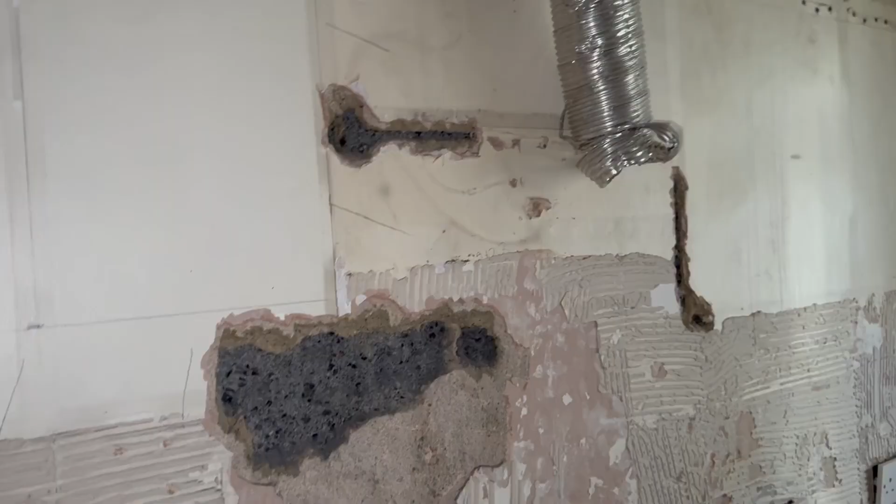First up, I'm seeing that the kitchen extractor fan appears to go out, but I'll just check it. That's often an issue. I'm seeing some localized rot here. That's probably where a sink was originally. Yeah, so you get some there.

So obviously all the plaster's been chipped off the base of the wall, which suggests to me that a damp proofer has recommended that, because it's only gone up to that height. But I wouldn't put in damp proof as an impermeable slurry.

I would put in either dry lining, which is just plasterboard, or I'll show you an example. I would use a thin insulation that is relatively expensive. It's called thermal space therm, and it has benefits.

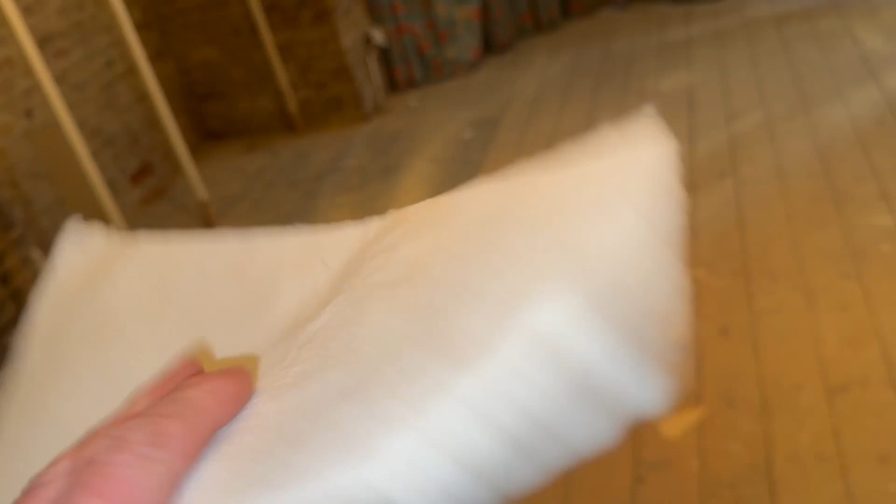So you want to have something that's breathable, so it allows vapour in and out. This one is a simple lining paper, but there wouldn't be much point having that on top of new plasterboard. But what you might think of is this.

It's called space therm. I've got the product name here. I've used it in a property recently myself. It's very thin, it just gives you a bit of insulation. It's breathable. And that's instead of plasterboard, or? It can be instead of plasterboard.

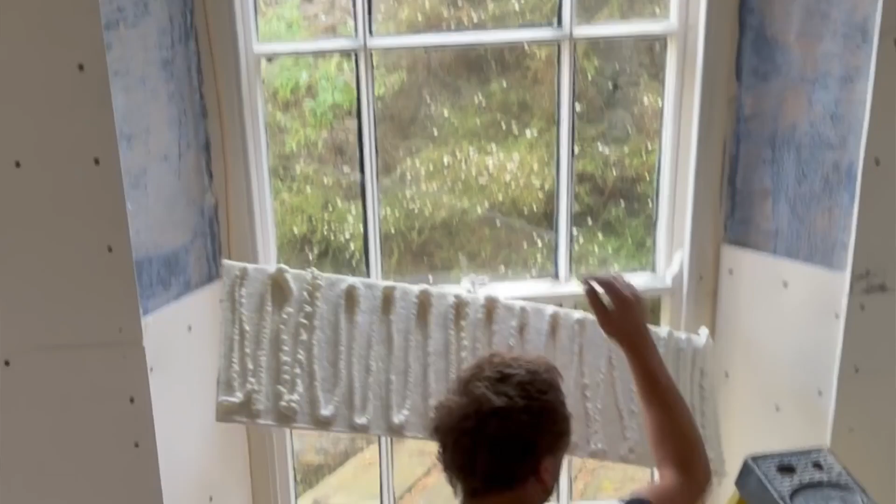I'll give you some more information on plastering it, because it's not easy to plaster. You have to use what's called blue grit on top of the space therm to get the adhesion, and then you have a final skim coat of plaster on top of that. But that's probably how I would go.

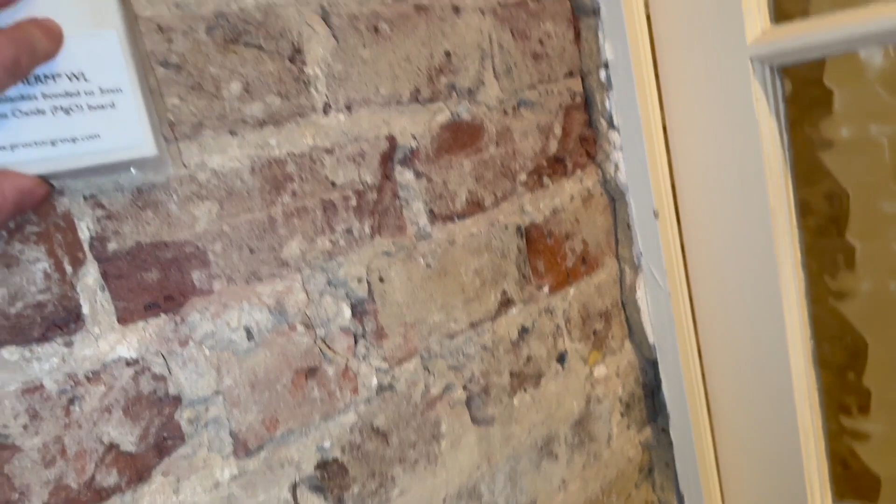You have blue grit on this, to give you adhesion. Then you'd actually use screws into the wall initially to get the bonding and adhesive, and then blue grit on top, and then it can be skimmed. You'll see it's not going to be very proud of the existing wall, so you're not going to lose space.

The three benefits of this are: you're going to get heat insulation, you're going to get some sound insulation so you're not going to hear your neighbours as clearly on the sides, and it's vapour permeable, so you don't have the issue that you get with slurry.

So I see the plaster's been removed from here. Yeah, there's a vent. If you feel inside the old fireplace, you can feel a draft. I don't know to what extent the chimney is open, but you can feel it. I'll discuss that in a sec.

But do you see how you've got this area here? Now I wonder whether you've got some hygroscopic salts here, and the risk is if you put anything aqueous onto this wall, the hygroscopic salts will come through.

But with this, because it's essentially like a fleece, a material, the water isn't going to go through that, so you shouldn't get hygroscopic salts unless you get extreme cases like a leak or that sort of thing. And anyway, when you do get hygroscopic salts, it's a very simple way of solving it.

But I'm looking at the way everything is. I'm guessing you had a case of hygroscopic salts here, which often people call rising damp, but it's nothing to do with rising damp. Yeah, it comes from chimneys.

But you can get those same salts from rising damp, but in this case I don't think it is. You're in London, you don't get rising damp in London because the groundwater is pumped out.

But could I, in theory, just—because my lease extension is going to be like a fucking fortune, I need to try to save money on the renovation.

You could dry line it, like just with plasterboard, and that will basically be fine. Originally I was going to get a guy, I thought, let's do the old-fashioned way, not like slurry, but the old-fashioned wet plastering.

I would just dry plasterboard. What you want—big tip—you need to use a non-aqueous, like a plastic type adhesive. If you use an aqueous adhesive, the hygroscopic salts will just go through the aqueous adhesive.

I'll find like an epoxy resin or an expandable foam type adhesive. That'll work because that's essentially plastic, it's non-aqueous. Let me just check on this, I'll push it down so I don't get worried about it.

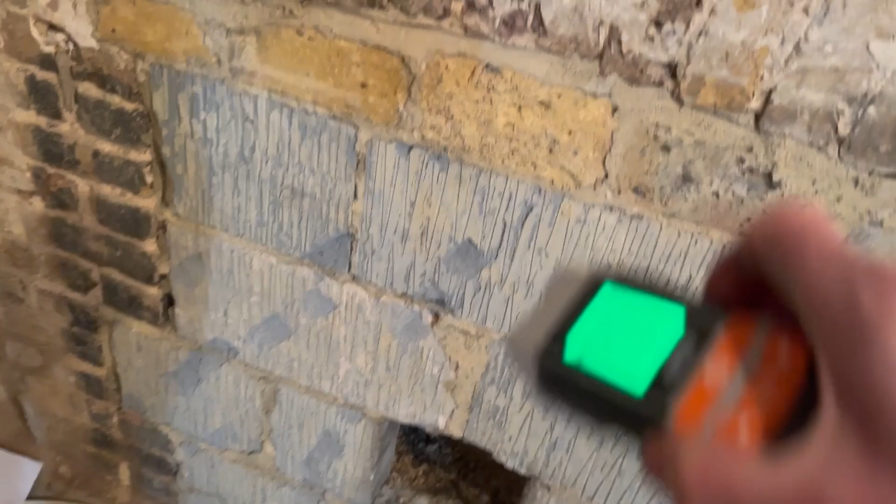It's useful to have a damp meter to tell how dry a wall is, whether it's drying out. On a flat masonry wall like this, that's telling me it's dry. You'll see it seems damper there than there, but that's because this uses radio waves, and it will naturally bounce back from a smooth surface more than a rough surface. So don't worry too much about the absolute number - it's a relative thing and depends on the material.

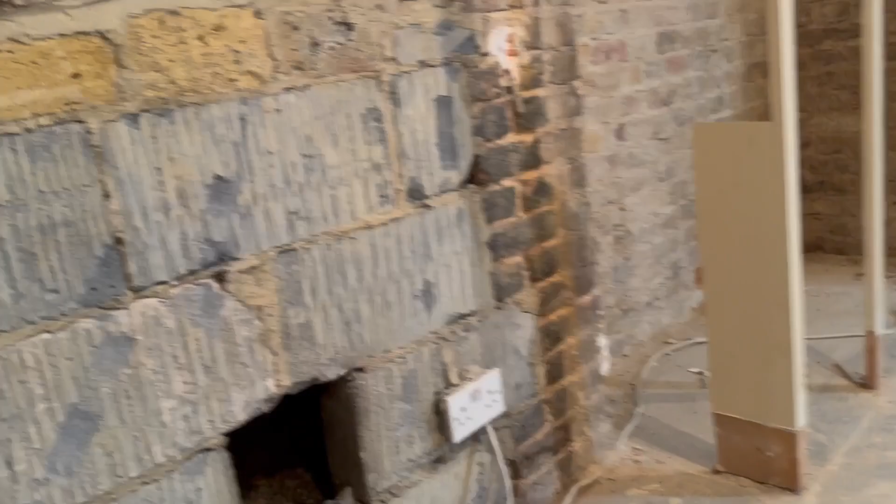So it's getting down towards the base of the wall. That sound of dampness, or the sound of the damp meter, is a useful indicator. But there's also a surface one, and maybe that can be more useful in this environment. I'm going to take part of it off - these are doing salts, and 20 or even below 30 is really what you're looking for. That's pretty dry, so no.

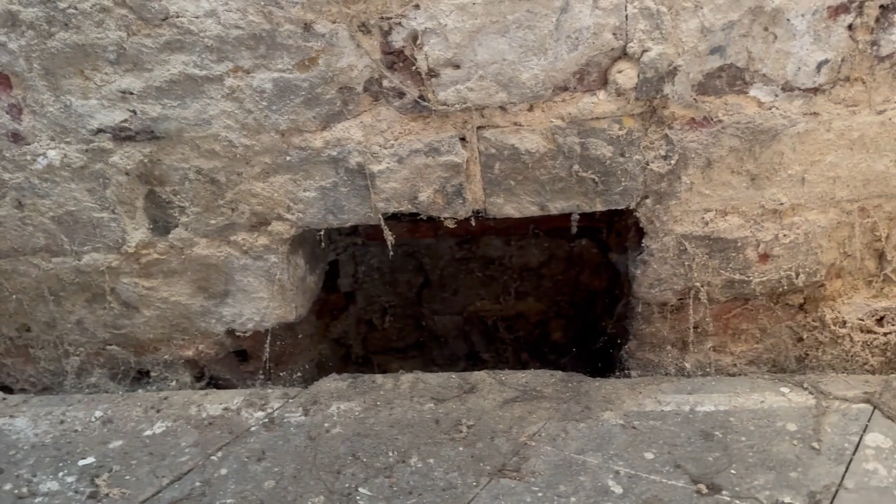These bays, you've got a risk of dampness from the outside. I think that's why the air brick was there - what it does is cool down this area. You see, it's damper here, and the reason why is, I assume you haven't had heating for a while anyway, but it's pretty warm without any heating, as you can kind of tell.

Normally the heating would have been at the other end of the wall, but I wanted to think about installing some plumbing to get a radiator here, sort of heat up this bay area a bit. Put insulation behind the radiator. Good tip - because the biggest heat loss is where you're putting the most heat next to it. Anywhere you want to insulate is where you've got the cold, so bays will tend to be cold, and I'd put insulation around bays.

Would you strip everything here and just redo everything, and use plasterboard? Yeah, you pretty much might as well, I would use... So I actually just renovated a property using this Spacetherm for the lower section of wall, and then the higher section of the wall I've used the cheaper Celotex.

Celotex is this type of material here - a sort of plasticky material. You don't want it for the lower sections of the wall because it sweats and will cause the wall to become damp and you'll lose energy. So what you gain, you end up losing, and you can also get rot in the subfloor void. But if you use Spacetherm below, you've got the vapour coming out here, and a cheaper insulation for the majority of this.

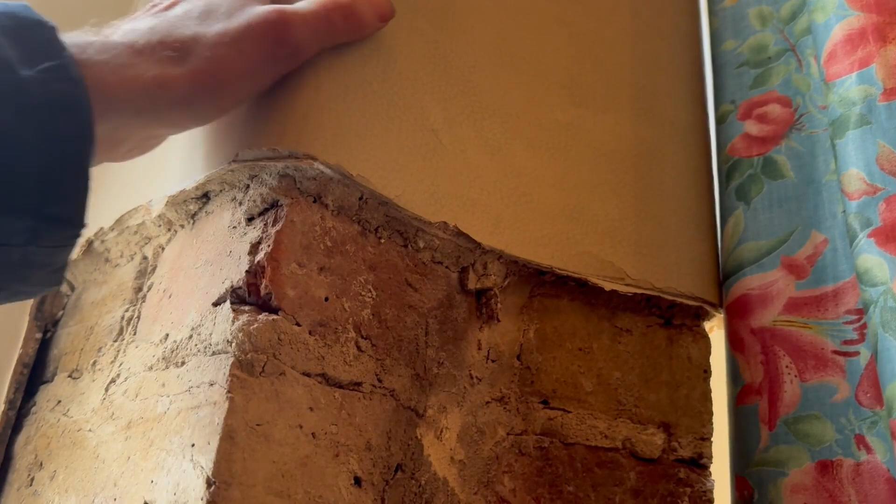Interestingly enough, you've got nice curved edges here. You can find it really difficult to get plasterers to put the curve in - they always want to use metal beading. I managed to persuade plasterers to do it, so if you find a plasterer just say you want that replicated, then you might get successful.

You've had a bit of a leak here as well. Oh no, maybe not. No - yes, there was something, and that was in the damp report that I sent you. They mentioned there was a leak behind the bathroom, the ceiling where the bath was. Yeah, it was a bit of damp, a gap - yeah, you can see. This goes into the kitchen there.

I don't know what you thought of the flooring. I was sort of eager to see. Well, I'll have a look underneath - it's what's called a suspended timber floor. I was going to, assuming everything is okay, instead of putting stuff over it, just sand it, stain it, and varnish it. I think that's a great idea, but what I'm going to recommend is having access to the subfloor void.

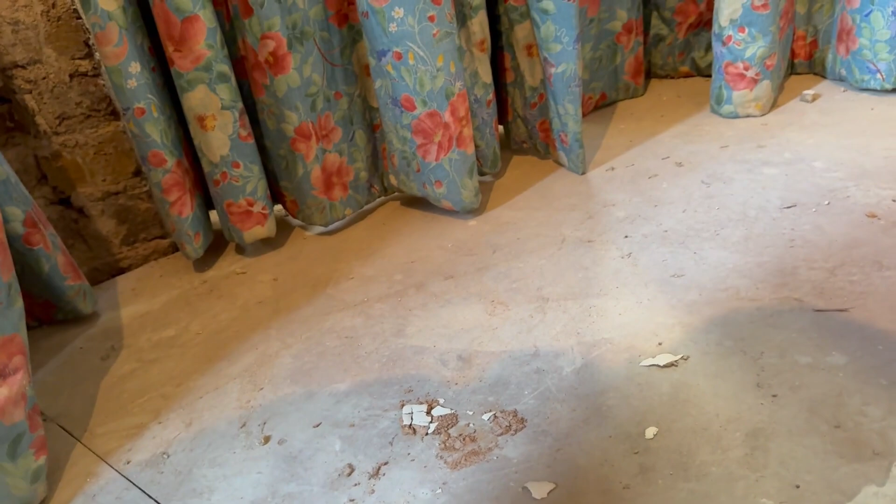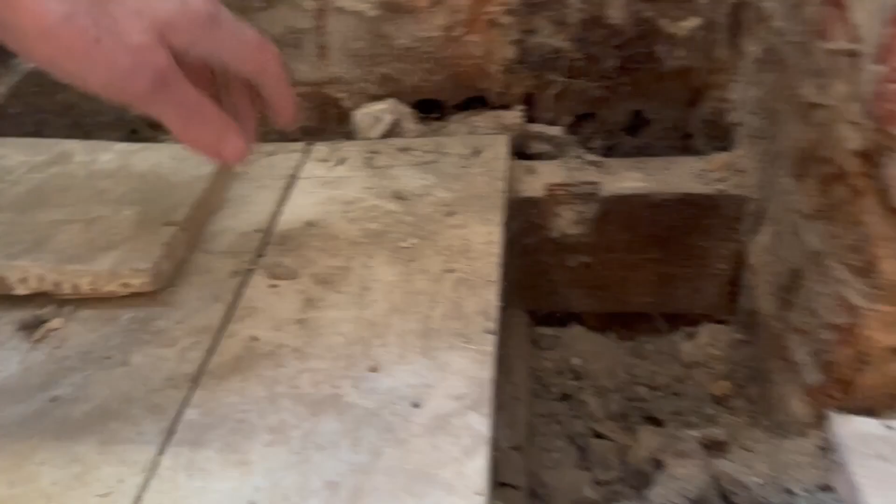And just keep a monitor, like a data logger, in there. You see how this piece of timber is broken - you can lift it up. Maybe this one lifts up too. It'll take a bit more persuasion, but I should be able to lift it up. Oh, there we go - and just have a monitor underneath there, so you can make sure there's no leak in the subfloor. Otherwise you have a risk of condensation forming above the damp-proof course and causing rising-damp-like symptoms.

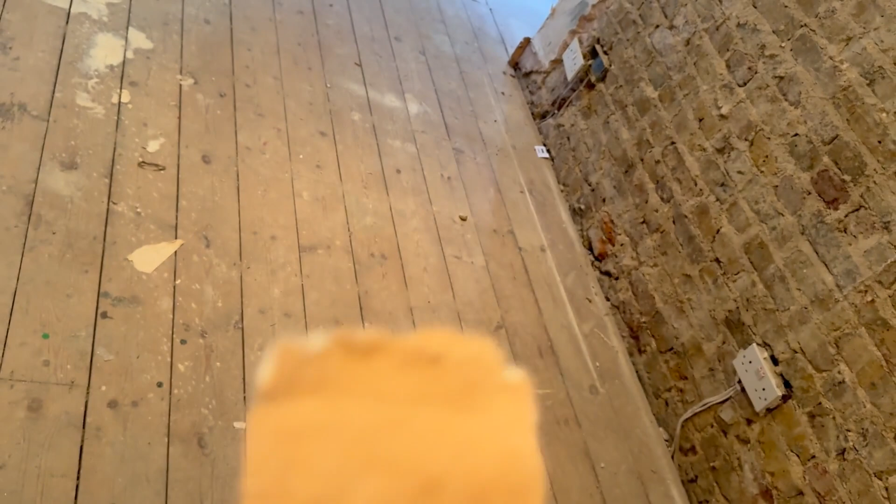This piece of paper is damp to the touch in humid conditions, and that's because it's got hygroscopic salts, calcium nitrate. A piece of paper like that would normally dry up, but because it's got these salts, and calcium nitrate has a specific relative humidity of 50% at normal temperature.

Just like, so I put these data loggers in this. These have got salt, normal table salt, and water. Table salt has a specific relative humidity of 75%, which is what I use to calibrate. So it's the same concept, and I think that's what you had there, and I think that's why your mother was led to believe she had rising damp, but it's not.

It's caused by the salts that come from the chimney breast. All you need to do is stop them moving onto the new surface. They're not a source of water. They're in dynamic equilibrium, meaning they're constantly evaporating and condensing in a cycle.

Got it, so it's nothing to be worried about. And if they ever did come through, for whatever reason, all you need to do is use an oil-based primer, like cover stain, like Zinsser cover stain.

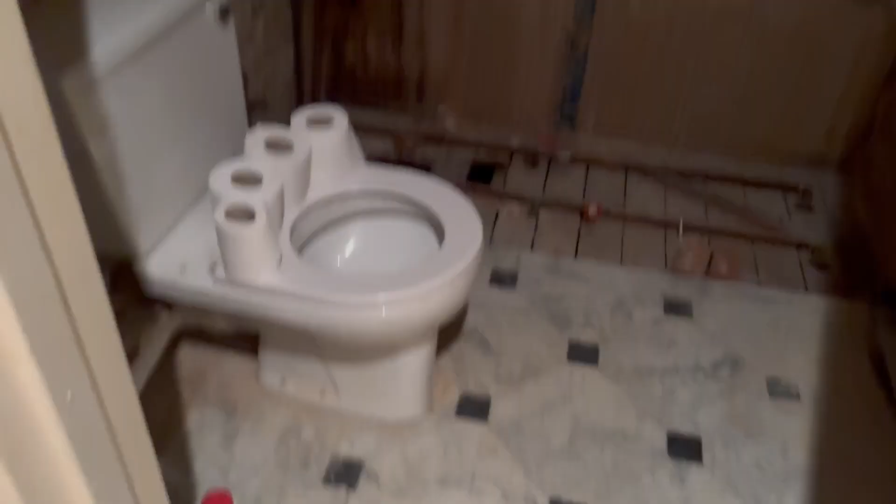Very simple. So we're talking about aqua panel, which is a good idea for the bathroom.

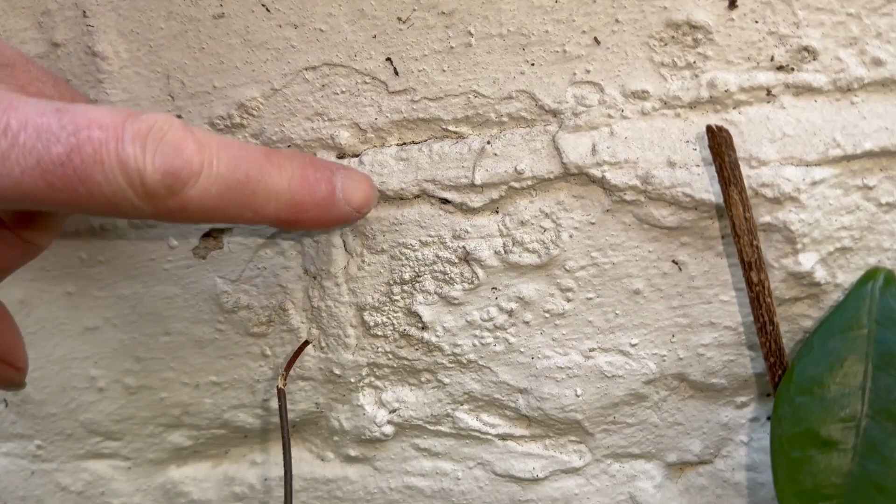This is painted, which is not brilliant, and it's just looking a bit rough there. But there's a bit of water that has got in here through the top, and is causing calcium sulfate salts from the mortar to crystallise under the paint, and this causes micro cracking, increasing the speed of dampness.

So what happens is you get a damp external brick that causes heat loss, but I don't see it penetrating all the way through. You just need to have it painted regularly. Do you see all of these little micro cracks? Lots of micro cracks equals quite a lot of water being absorbed.

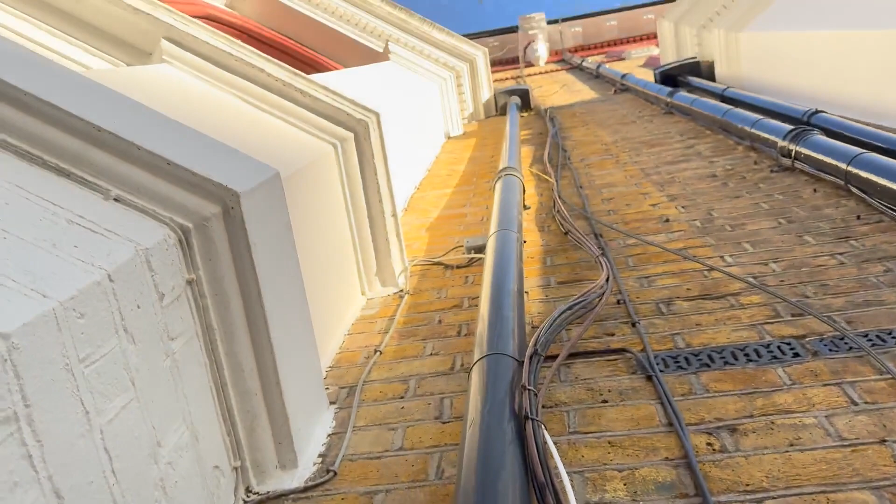You've got timber here, it needs to be painted. It doesn't feel like you've got rot yet, but I think you'll get timber rot fairly soon if you're not careful. So you see that green, that's an indication that water is overflowing, probably from the hopper there, but possibly even from the gutter all the way up at the top.

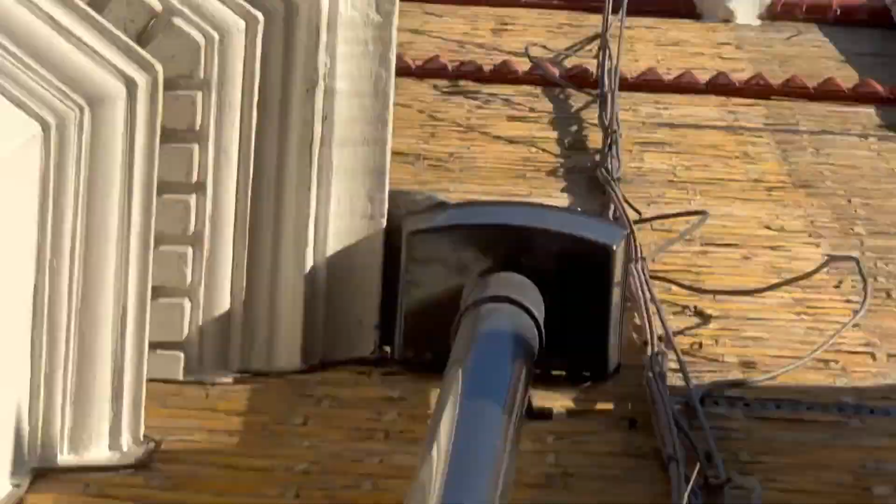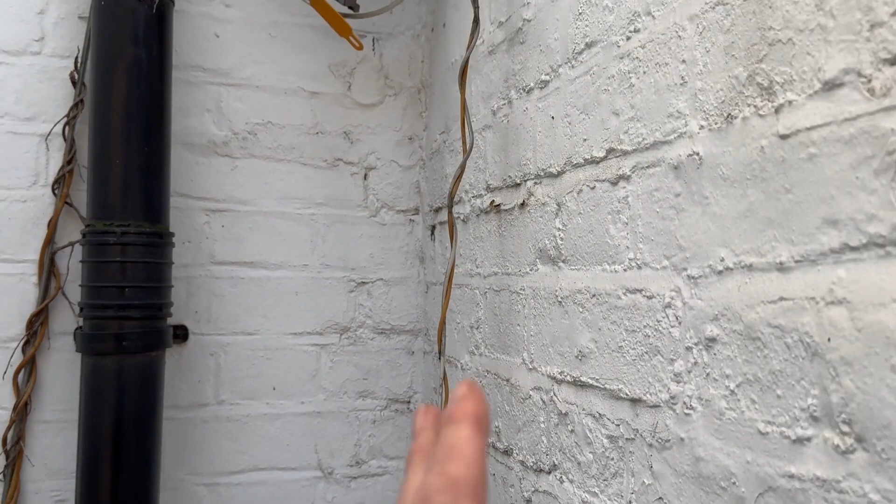You'll have to have a look during a rainstorm. I don't think it's particularly going to affect you. It's got lead flashing, I'll have a look on top of that as well. Yeah, this is going to cause heat loss. This wall here is a thermal fin.

Now your neighbours had damp proofing treatment, and I'm just going to talk it through. And what I recommend you don't do is what your neighbours have done. Let's have a look through here. It's difficult to see, I was just talking to the camera.

Another survey that I've done shows that if you have too high a fan speed, it's noisy, and people don't like it, so they turn it off, and it becomes counterproductive. I think that's fast enough, and also this light turns it off immediately. I wanted to get a humidistat - I would get a continuous flow bathroom extractor fan. They normally have humidistats as well.

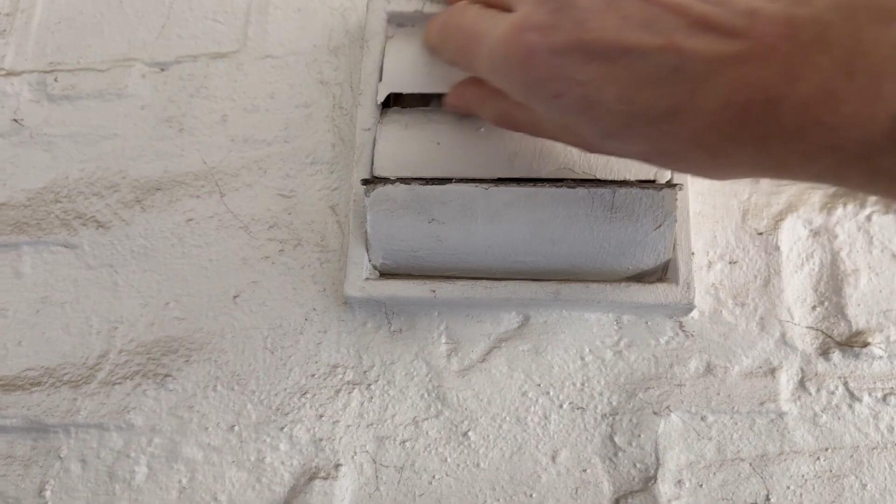The interesting thing with this is it's raised up. I had that at another property today, two in a row. Yeah, well, I had the electrician come on. He actually figured it out that it was going through there, and I was like, 'This is very good.' Anyway, I've needed a bit.

Or you're getting - I mean, it's a kitchen fan speed. You're getting 40, it's a howling gale.

When it comes to walls, you want to, as far as possible, be homogeneous. Obviously I've talked about something that isn't homogeneous, but that's for practical reasons. But you don't want to change the material too much between walls. And I think that if you had a separate plasterboard going on to plaster and then the whole thing replastered, I think you'll get a crack appearing where the old plaster is left.

Fine, okay. So anyway, in terms of the things that need to be done here, that's so I can tell the freeholder - whether they'll get on with it is another matter. But do you see all these cracks?

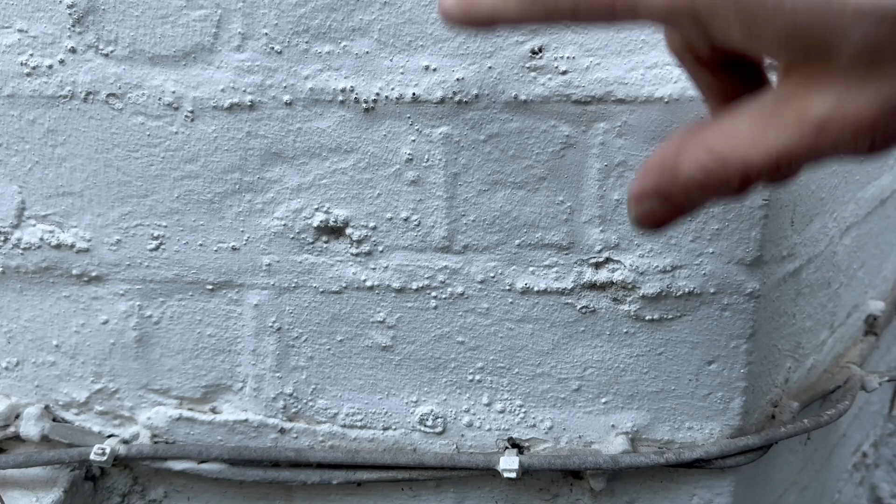These micro cracks will let water in. So wire brush down as far as possible, and then repaint it with the same paint as you have here. It's not a big deal in this case, but over time it will eventually become a big deal.

This isn't affecting you directly, but this is just an example of how you get calcium sulfate salts blistering. So they need to strip all this out and redo it.

And that's the same reason why you have this rust on, the fact that it hasn't been painted for a while. That's basically it. It needs to be done every so often. Most contracts will say every 7 years, something like that. I don't know what yours does.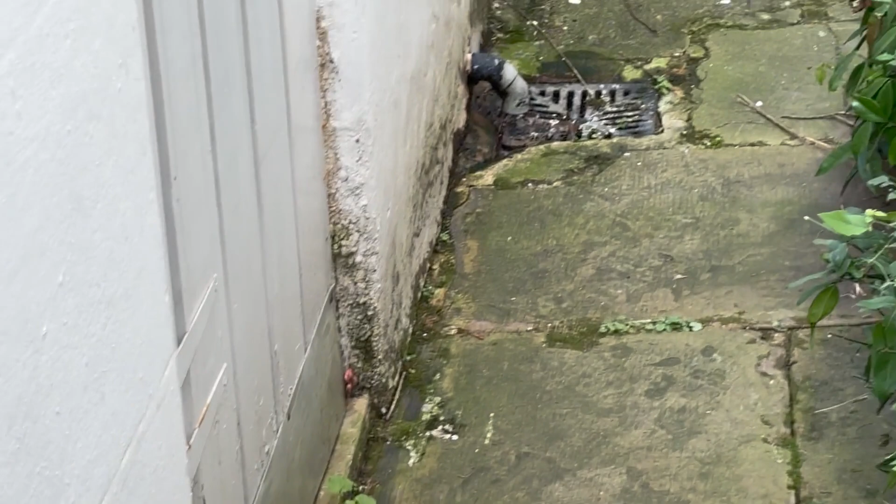Ideally that is drained away to over there. How you would do that here, I don't know, whether you use some sort of guttering system. It's probably fine as it is, but be aware that water coming down here is liable to be absorbed into here rather than go to the drain. It could pond. The drain looks okay, but again, have a look during a rainstorm and see what's happening.

I don't think it's ongoing, but you've got signs of woodworm here, just looks really old. You can spray it with permethrin, I'll give you links to doing that, but I'm just highlighting it as a potential risk. The thing here, though, is your subfloor is very shallow, so it's relatively easy to fix any decay if you did have it.

It looks like woodworm, it's difficult. I would guess it's an odd one, because it looks like wood weevil. Wood weevil's normally accompanied by cellar rot, which I don't actually see any of, so it's difficult to know for sure, and that's why I think it's really old. They both need dampness, so moisture is the trigger, as it were, what makes it tasty. It's a type of beetle, wood weevil is a type of insect, a beetle. It's got a life cycle of typically a few years.

So what you want to do is spray it - wood weevil actually doesn't need spraying, so possibly in this case I wouldn't worry about it. And I can't see any signs of the most common form of woodworm, which is common furniture beetle. So I actually wouldn't worry about it in this case, but I'm just bringing it to your attention, really.

That's reassuring. Well, my report will be a starting point. You'll get rid of the damp by following all my recommendations. The hygroscopic salts you'll deal with as I've recommended, and I would have some degree of insulation here, just because it will be more comfortable.

Bathroom, kitchen, just get good extractor fans. The main cost is the electrician rather than the fan itself, so you might as well get a good one - a continuous flow bathroom extractor fan. Kitchen fan, I wasn't able to check it, but let's assume it goes out. And also just have a dehumidifier running 24/7, particularly if you dry clothes internally.

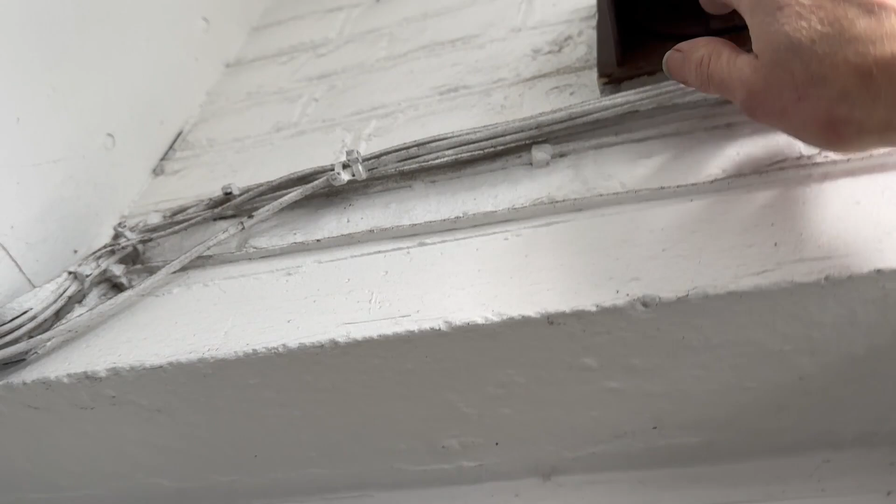And you have it, the floors often cause rising damp-like symptoms. The reason why is, even though this is possibly on a suspended timber floor, hence the cracking, it's because condensation will form on the cold stone, and it won't absorb the moisture, so it will amplify. Unlike wood, which will absorb moisture, stone won't, so it will just cause condensation on the stone and rising damp-like symptoms.

I'm going to write up a report at some stage that I did about 6 years ago probably, where it was a property which had been damp-proofed. They had lots of damp-proofing, and that failed. It was the leading damp-proofer in London, and they were recommending £16,000 worth of damp-proofing treatment. And it turned out that it was just the bathroom extractor fan that wasn't working. That was a similar situation, not far from here. So I'll leave you to sort of the rest of what.

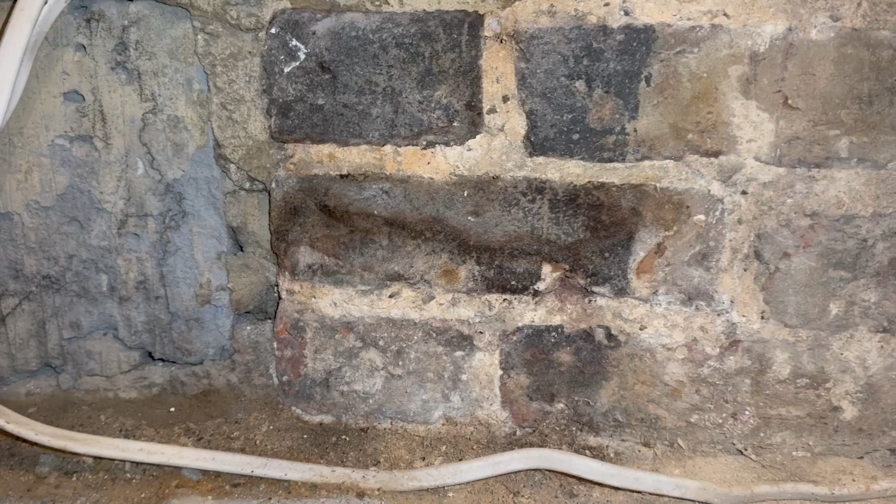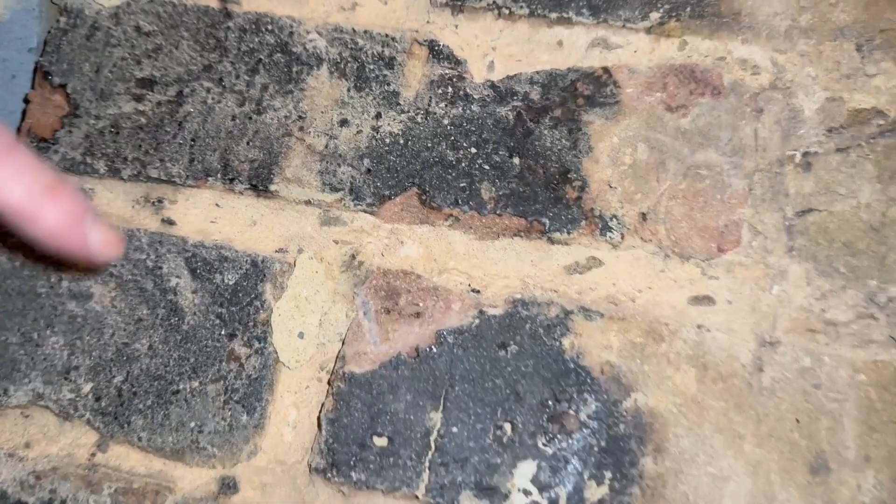These are hygroscopic salts. A lot of people don't like the fact that I use damp meters, and the reason why is that salts will be picked up, but so will dampness. The interesting thing is that we have hygroscopic salts here, you can see the reflection. Those are hygroscopic salts there. So below it, it's dry, and then these are the salts.

This is common around chimney breasts. In this case, they're just going to dry line it. But important with dry lining is the need to have an oil or non-aqueous based adhesive, otherwise the water will just come through the adhesive. And to know that hygroscopic salts are not a source of moisture, they're just drawing out the moisture from the air.

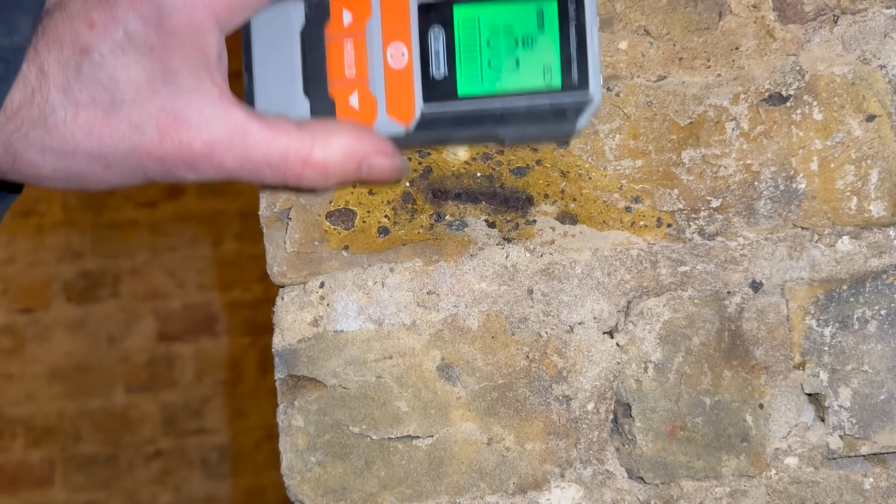It's harder to tell dampness in a wall when it's been stripped. This is interesting - that's just the metal there, metal in the brick. Interesting. Surprised I didn't get a higher number, but anyway. I normally use... there you go. Drier there than there. So the metal in the brick is rusted now.

So we're looking at the subfloor now. Oh, interesting. And then it's pretty dry. I've got a hygrometer going. So the air vent comes through there. Yeah, nothing really to worry about in the subfloor.

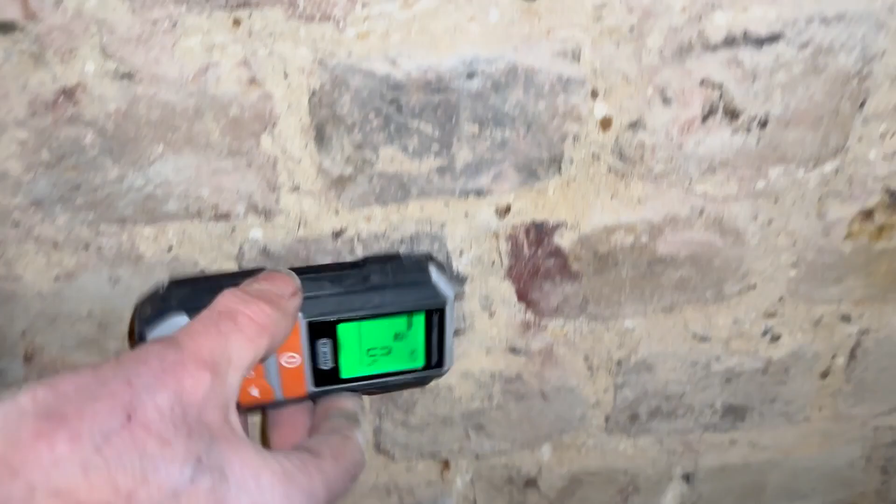It's a quick way of checking whether a wall is dry, and it seems to be fine. Brick is harder to do because it's uneven, but it will give you a quick sense. This one is pretty dry, but if we look over here, then we've got dampness apparently there, but dry there, and it's actually to do with the metal in this wall.

I don't know whether the metal's... well, presumably the metal's not there. It's dry lower down, so the metal will cause condensation - it's called interstitial condensation. Go on to surface mode. Yeah, so that's the metal in the brick. So it's not always a sign of damp, but it's a really good way of telling if the wall is dry.

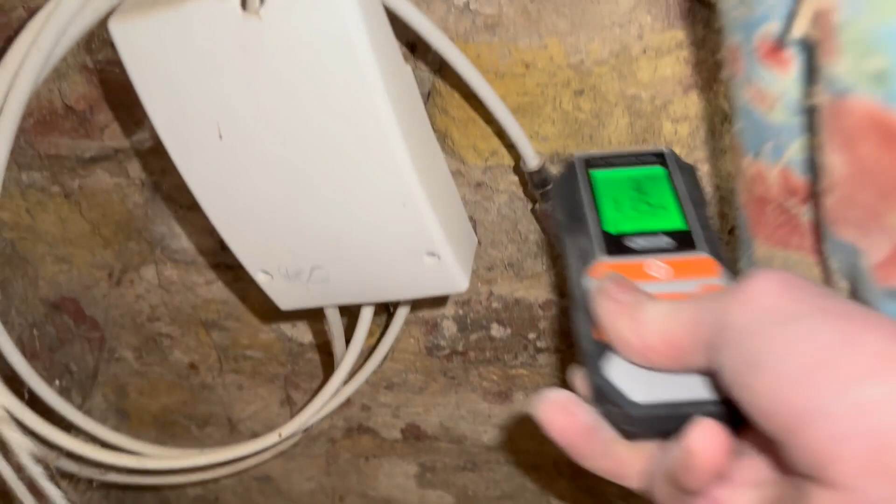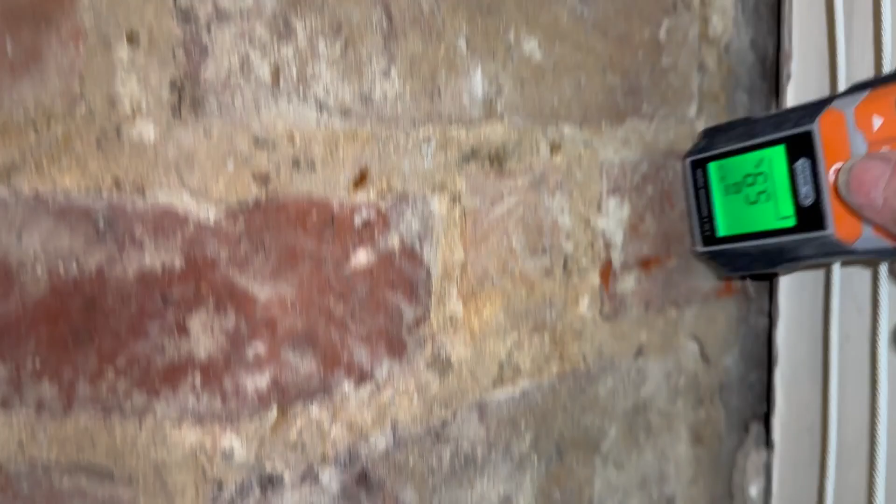We're getting closer to the outside. There's going to be condensation from behind, behind the curtain's damp itself, and you get poor insulation around here. So you should never take the reading as absolute, but it gives you an idea of what's happening. It's consistently damp around the base of this wall, and you're getting mould here, and mould behind the curtain. And this, because the plaster's been removed, there's a lot of heat loss, but no air movement because of the curtains.

Looking in another zone, and see what we can see. I mean, it seems fine. Asking me about the sockets. You're asking me about the sockets.

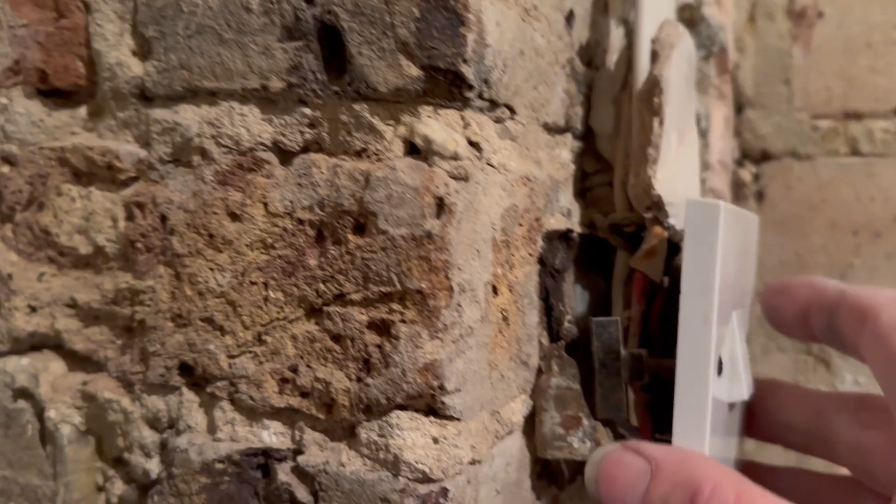You can see you get condensation, and there's rust there behind, and it will cause fusing, and that's why they will go often in high condensation.

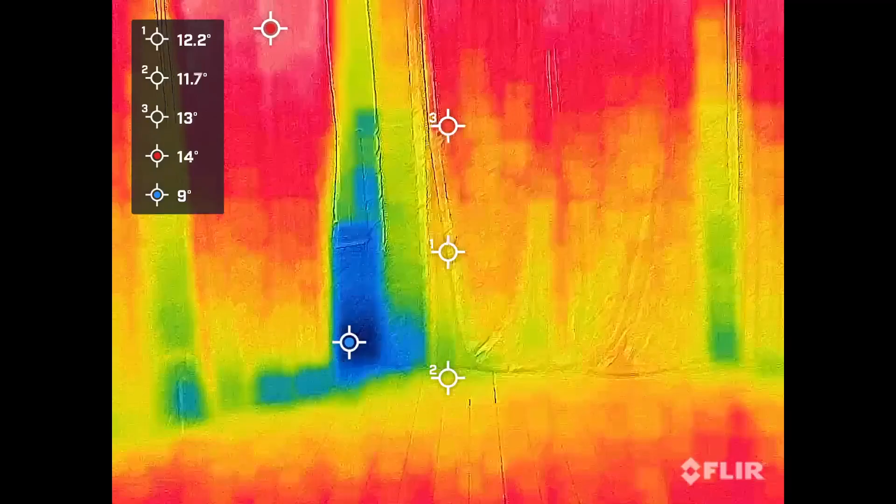This is through a thermal imaging camera. Do you see the heat loss you get in the corner? The primary reason, there are two reasons you're getting it in the corner. One is that you get a lot of heat loss into the corner. Well, it's not the corner actually, it's a bay, and it's unusual - you've got thick brickwork there, and then it's thinner there. But it's also because of the curtains. What happens with the curtains is they're stopping the heat from inside the property, so you'll get some natural heat from your neighbours, even though you're not heating it up.

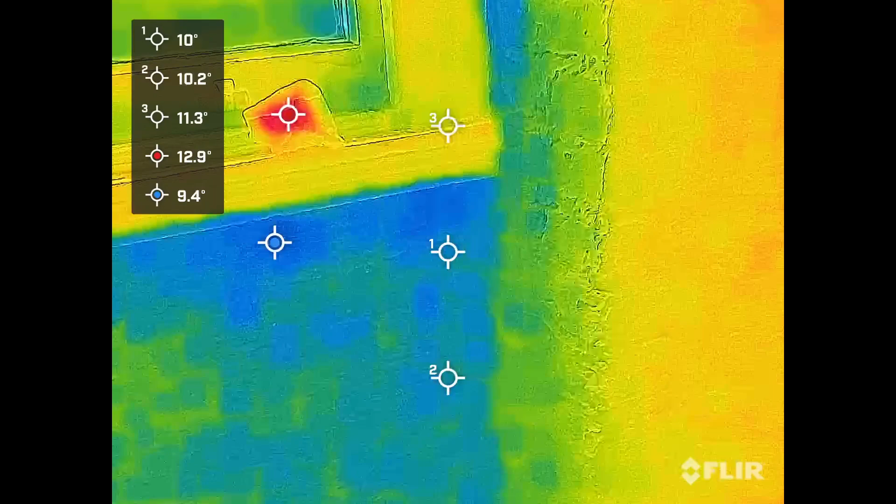This will trap the heat, and what's happening is there was some dampness down there. You can actually feel that it feels quite moist if you feel the bottom of the curtain. And you're getting dampness down there. So I would actually, if you can lift the bottoms of the curtains up to get some airflow, that would be better. I'm guessing you're not going to keep the curtains long term. Disgusting. Well, yeah.

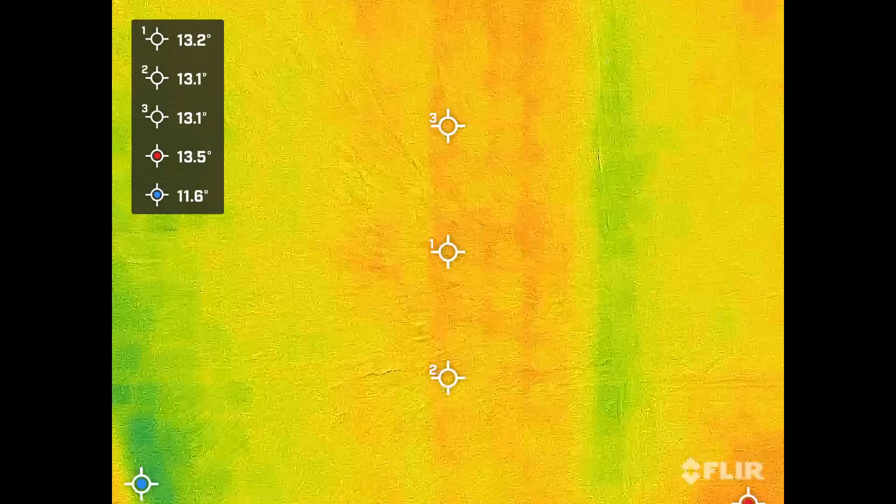So I'll add this to the report so you'll be able to see things. And there's some mould all there - the sockets at skirting board level don't work, supposedly because of the damp issue. Possibly, but I'm getting it rewired, but obviously I need to.

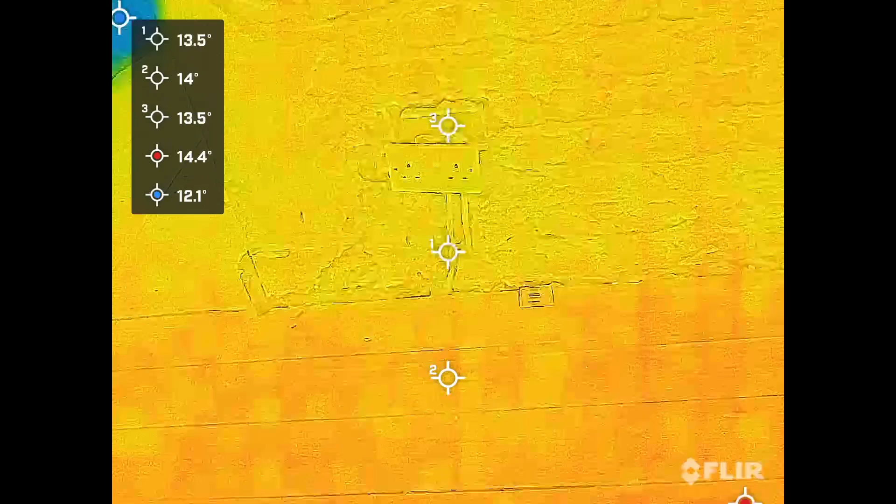The reason why you get dampness, you get condensation around sockets, is you get a lot of heat loss. The wire is going into the subfloor void, and the subfloor void will have low temperature because it's connected to the outside. So you're getting heat loss into the wire, and then it's going up into the socket. So you get a plume of condensation and mould around sockets. It's very common - you'll get it more on external walls, but you also get it on internal walls. And if you've got condensation in one socket, you're liable to get fusing and the whole ring going.

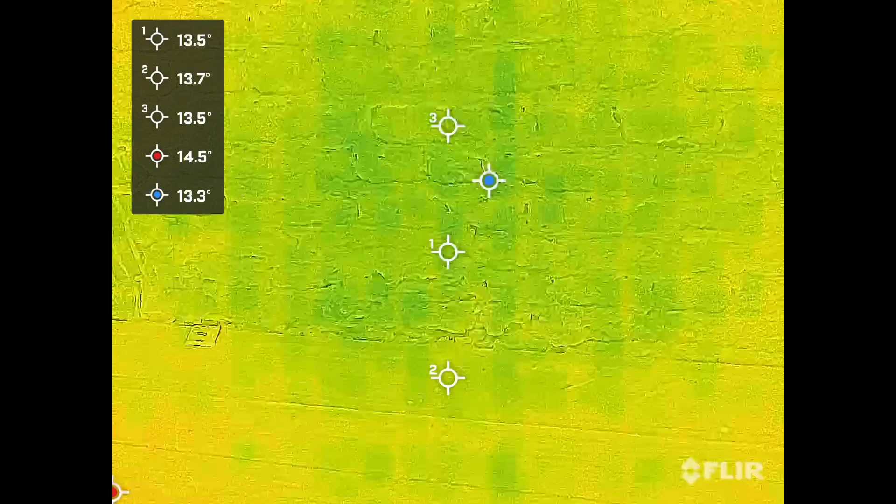And the way to fix that, or stop that, prevent that? Well, to deal with the root cause, which will be vapour - and I believe from looking at it that the bathroom extractor fan might have been running fast, but it probably wasn't working when it needed to work, which is for the half an hour after the bathroom stopped being used.

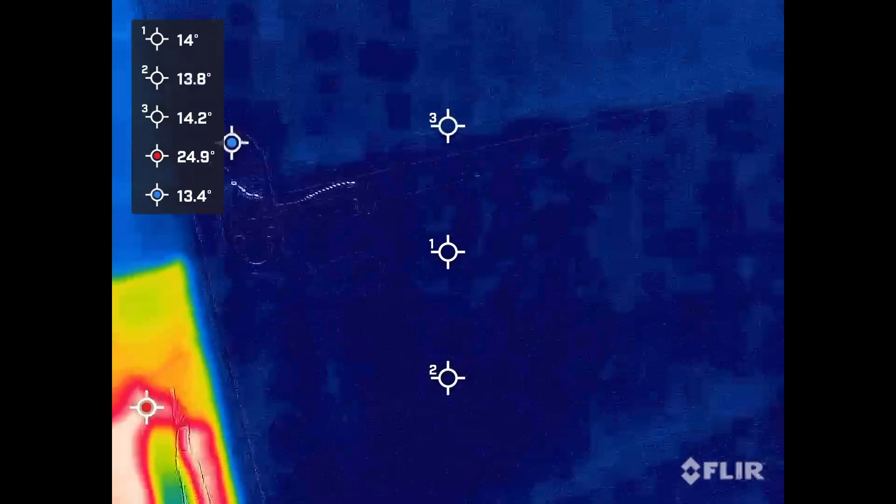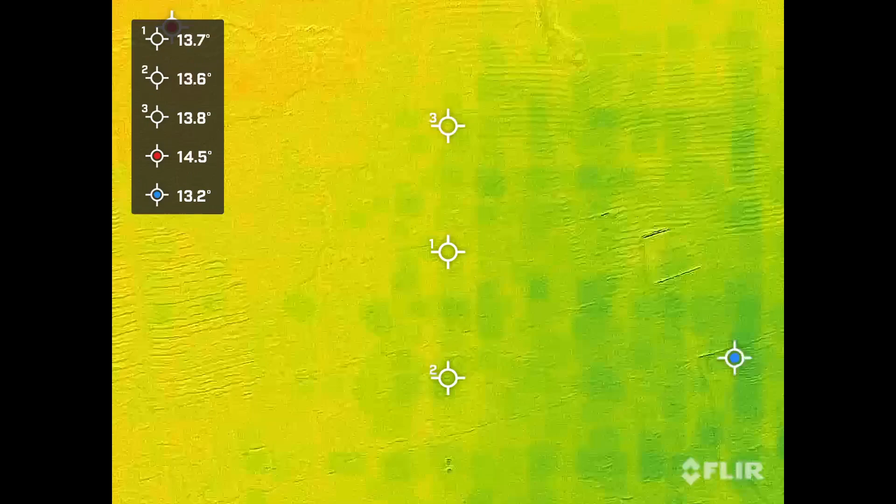I'd say that's the primary one, and probably drying clothes internally. Kitchen extractor fan, I'll have a look. You can't really tell anything from that, but does it work? I have no idea, I don't think you can push it on.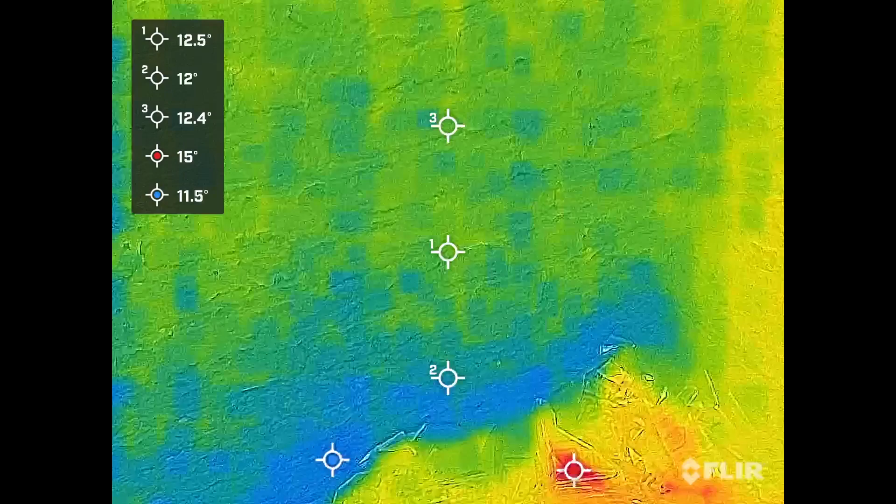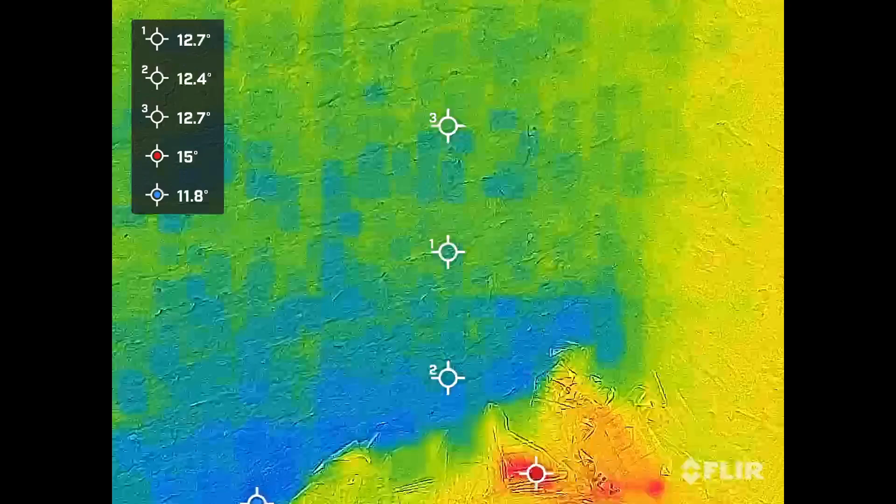The only one is the hygroscopic salts, and there you're going to have to have a separate layer, as I described. Yeah, like the dry lining. Which can be with dry lining and plastic adhesive, epoxy, expandable film.

So I've got this website that I've created called damp.ai/detect, and all you need to do is upload your files here. I've already put them into a folder, upload them, and then choose which wall you're going to have as your damp wall data and vapor source. And in this case, let's use...

To some extent, it doesn't matter because the property is vacant, so we're not going to see that much difference. But at the time of the survey, I believe the temperature was 10 degrees centigrade. So I'm going to, and it was on the 14th at about 12 p.m. So that puts in the temperature.

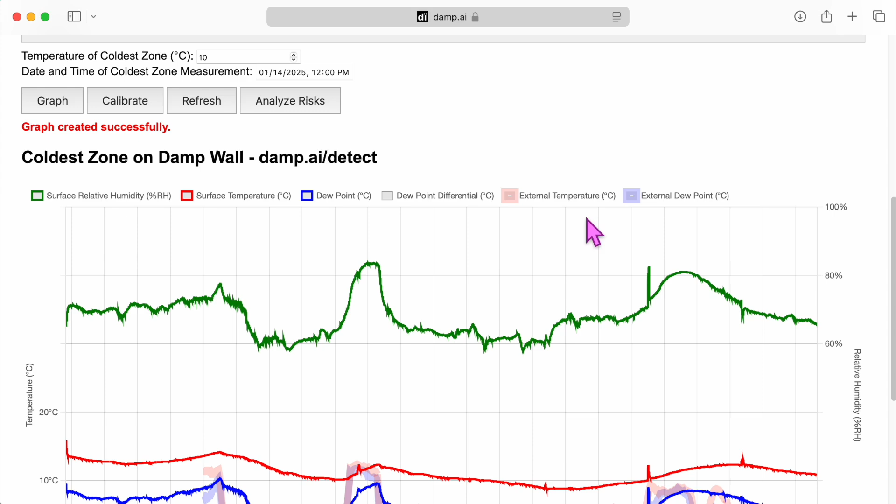And you'll see here is the relative humidity, so this is the surface relative humidity line. And actually it's reasonably good, and that's not surprising because it was relatively dry, uninhabited, and no major problems. If it was going above 85% for long periods of time, you might worry that you were going to get high surface relative humidity, ideal for mold growth, but I'm not seeing that.

This line here is the dew point line, and you want to keep that dew point line below the outside temperature. It isn't too bad. I mean, if I do an analysis on it, so if I press this button, it will give the Dew's Law compliance, which is only showing 36%.

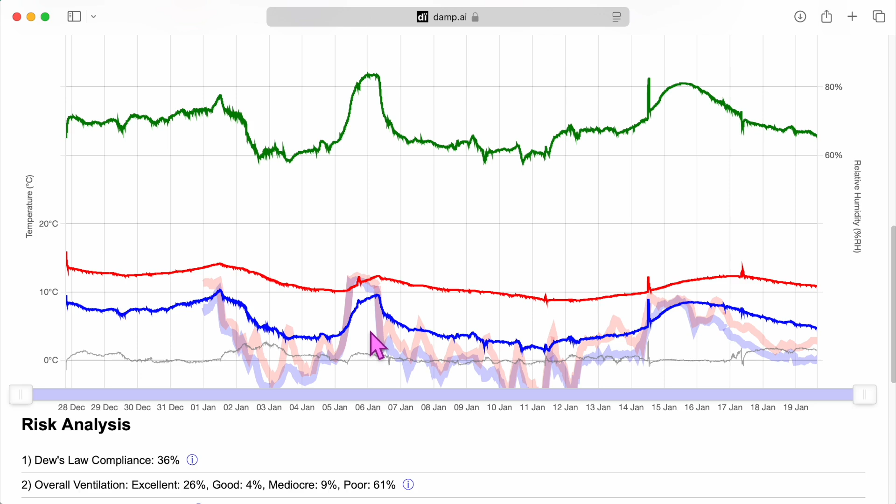But given that it's an uninhabited property, it's less of an issue because of this vapor level here. You can see when the dew point line, the internal dew point line, is below the external dew point line, there is more vapor outside than inside, which you get at different times. This is the surface temperature line, and you seem to be being warmed up by your neighbors, I think.

So I'm not seeing major problems, but use this going forward. And as I say, you can quickly flick between one and the other, so when you want to compare one to another. So in this case, I'm comparing the bay to the left reception wall.

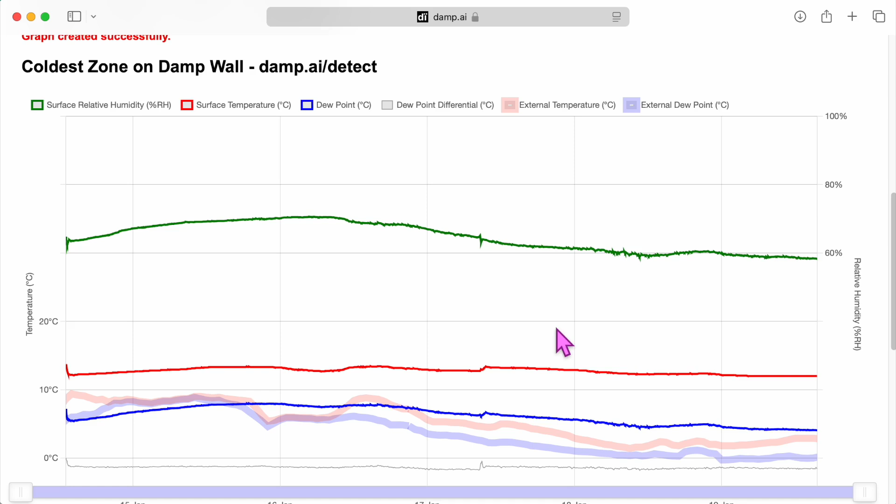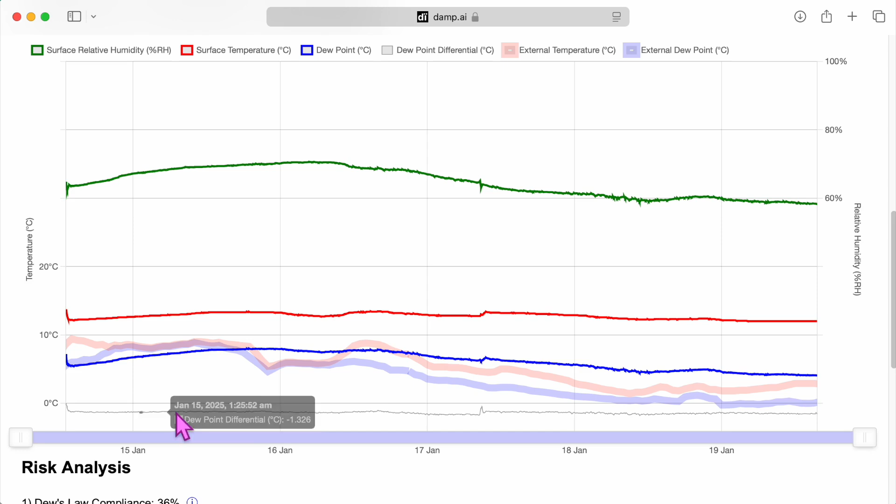The interesting thing here is also this line, which is what's called the dew point differential, and that's telling you that there's more vapor in one area than the other. You'll see there's virtually nothing here, and that's because they're essentially in the same zone. You wouldn't expect to see any major differences.

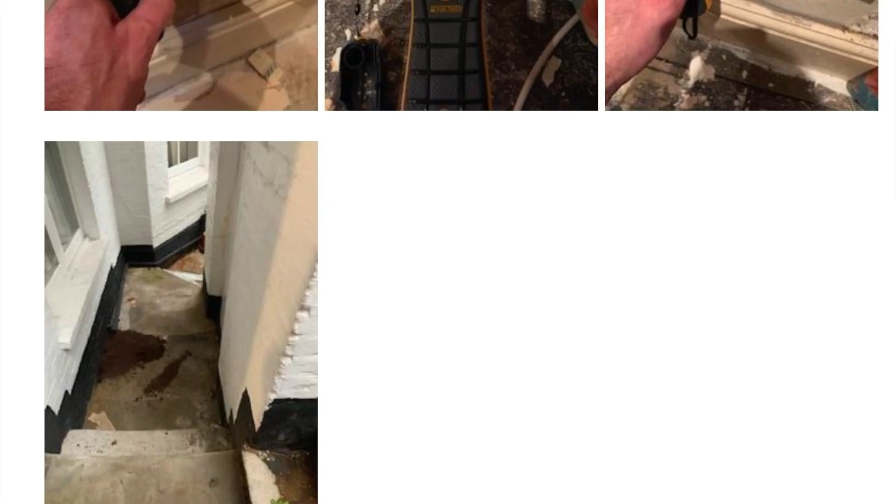I'll do that again. Do you see this one is very close? So this is to be used going forward, and you'll see in the background I've been showing pictures of the quote you had for rising damp treatment.

You absolutely do not have rising damp. You are in London. The groundwater in London is pumped out to 60, 65 meters below ground. You're in central London. If it wasn't pumped out, the tubes would flood and there would be major problems. It's been done since early Victorian times and probably before for industrial purposes. So you absolutely do not have to worry about rising damp in London.

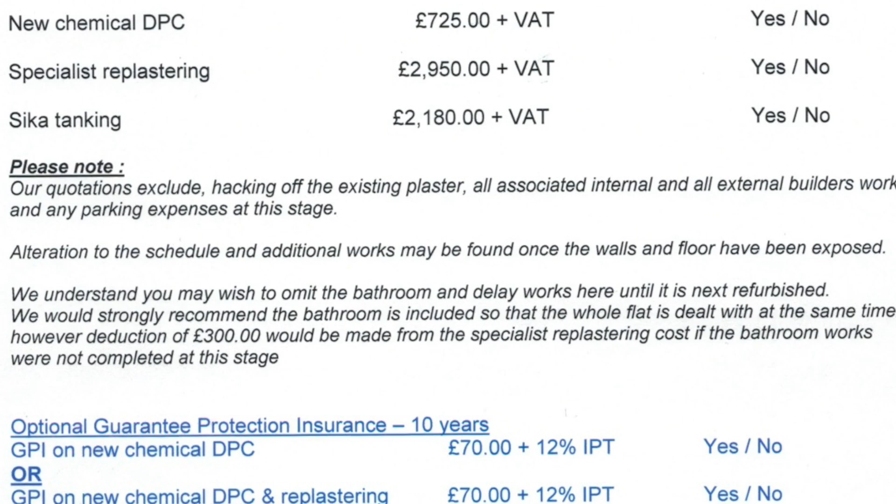Nobody does. There should be no companies existing selling rising damp treatment in London. It's a fraud, it's a sham, it shouldn't be allowed. They are almost certainly saying that the hygroscopic salts that appeared to be in the chimney breast were as a result of rising damp, but in fact, it mainly comes from the burning of coal.

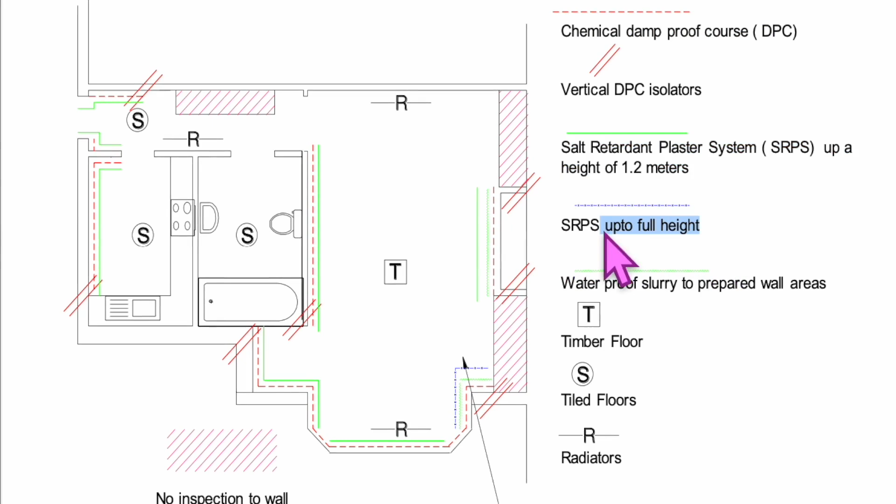And what I'm going to be recommending is that you essentially dry line it using a plastic adhesive, like expanded foam adhesive, and then the hygroscopic salts won't come through the absorbent layer. And to keep your costs down, you can use just dry lining throughout, so battens and plasterboard. It's very simple.

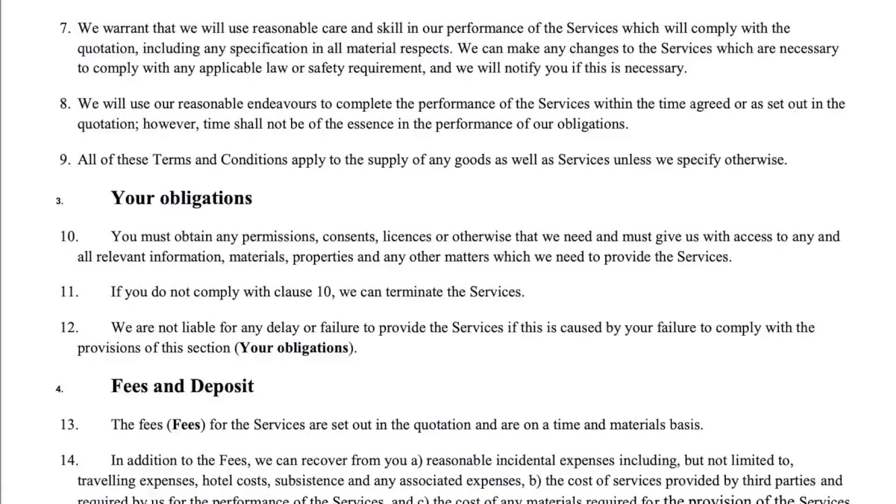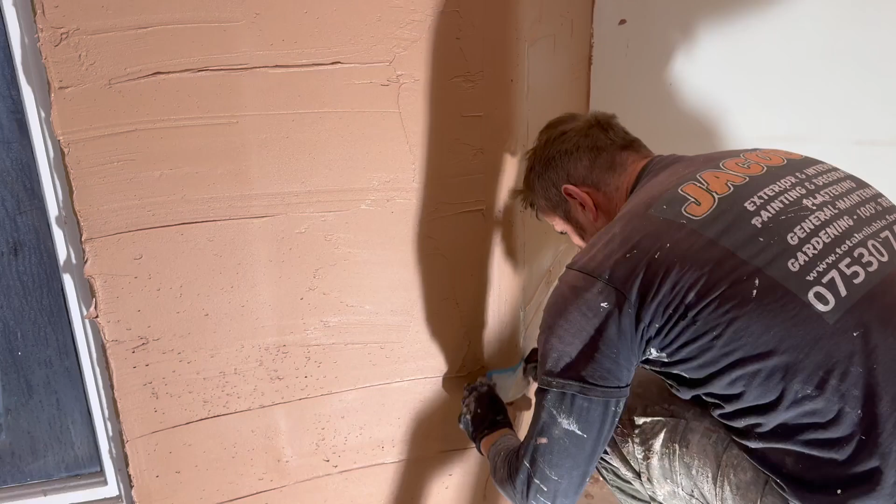It's very cheap, but I talk about insulation during the survey, so do have a look at that. And I'll put in some examples, but that's an additional cost. And really the plastering, I would say, it'll probably take somebody best part of a week to put up the plasterboard, and probably another 2 or 3 days to finish it, put in finishing plastering.